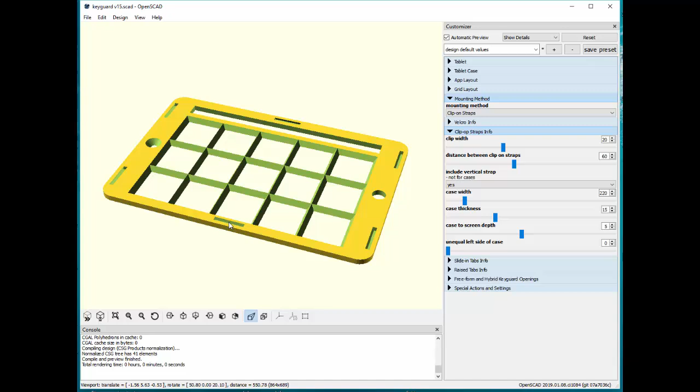I can add a vertical strap as well, meaning opposite these two straps, by saying yes. Then what I get are cuts made in the keyguard for a strap going the opposite direction. That option is not there if you're in a case, simply because cases get very weird on this side or this side. But they're pretty regular on either side of the long dimension.

So we'll put this back at no for now.

While we're here, we can set the distance between these clips. We can also set the width of the clip itself. So if I need a very narrow clip for some reason, all I do is change its width to something smaller than the default 20. I can set the distance anywhere between 20 millimeters between the openings to something possibly even larger than the keyguard itself. So that's larger than the keyguard, 120.

And that's really the only thing I need to do to get clips defined properly if I'm not using a case. So then I would just simply save this definition, this model off, and print it.

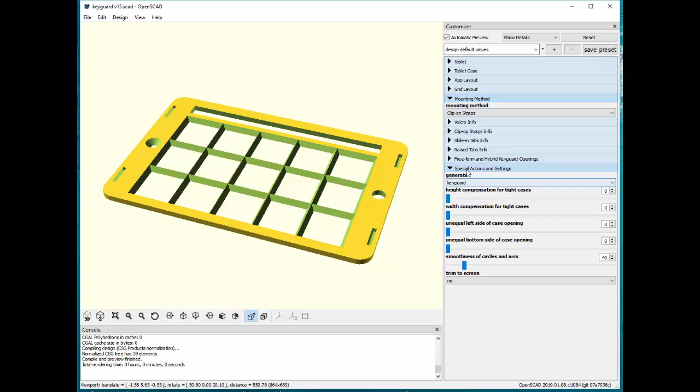To get the clips themselves printed, I look in Special Actions and Settings and choose Clip. And now there's the clip that I would use to attach one end of a strap.

And for the keyguard we saw a moment ago, I'd need 4 of these, or 6 if I had the strap going crosswise as well.

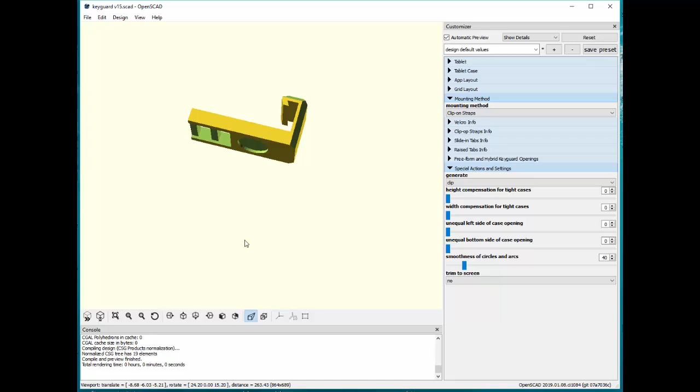Now we'll go back and look at that keyguard again. But this time we'll say that it's in the case that we looked at earlier, the blue case, which has a hard-sided screen protector inside a soft-sided case.

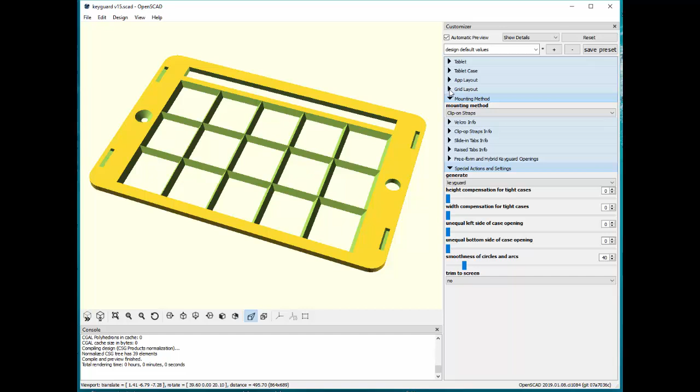I'll go up here and we'll choose Have a Case. Yes, we do. Well, as we noticed earlier, the screen protector comes right up to the edge of the screen, meaning that there's very little plastic on either side of the keyguard to put these cuts into.

I might have had to do this anyway if I were creating this keyguard, but I need to add some additional width to this keyguard, to compensate for the fact that the case itself is very narrow on either side. So down in Special Actions and Settings again, there's a way to compensate for tight cases either in height or in width. We're just going to do the width compensation for now.

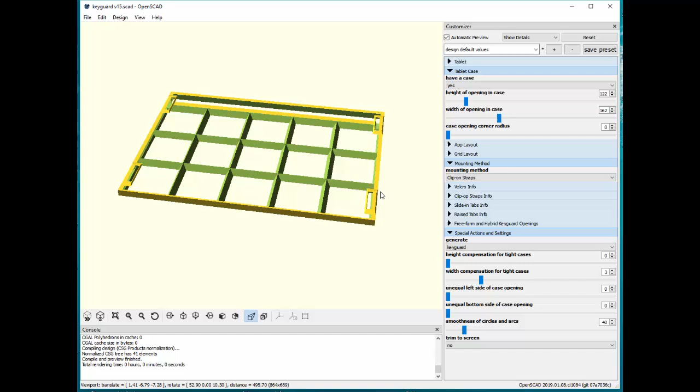I'll just take this up a little bit at a time. You'll be able to see that it's starting to thicken here. Let's zoom in - starting to thicken here. I want to get that thickness all the way out until it's underneath the cut that we're going to put in the keyguard. We're almost there. So I had to make it 12 millimeters thick, add 12 millimeters of thickness here, so that we have space for this little pedestal and the cut that goes inside it.

And you can see the pedestal a little bit more clearly here. The pedestal's height, how far this little ramped area comes up, depends on how thick your keyguard is and how far it is from the surface of the screen up to the edge of the case.

We measured that previously in the video, and the distance of case down to the screen was about 6 millimeters. We find that value in the clip-on straps info region, along with things like case width and case thickness. But here's the case to screen depth - we'll up it to 6, which is what we measured for that case, and you may have noticed the pedestals got 1 millimeter taller to account for the extra distance between the edge of the case and the screen.

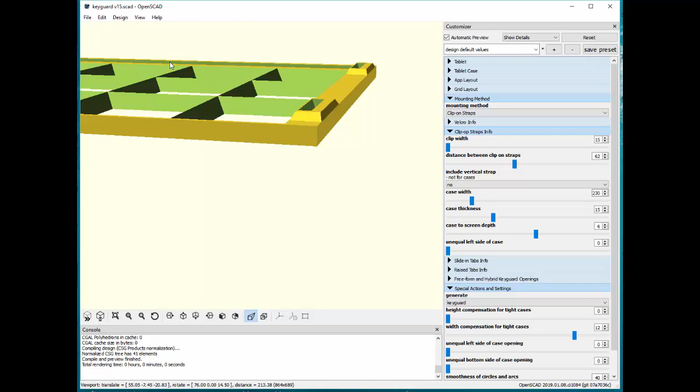Then we measured the case to be 230 millimeters wide, so we'll take it out there. You won't see any obvious change here because we haven't changed the dimensions of the opening in the case. But what we are affecting right now is what the clip will look like. So since we've already seen what the case looks like, let's go take a look at those clips.

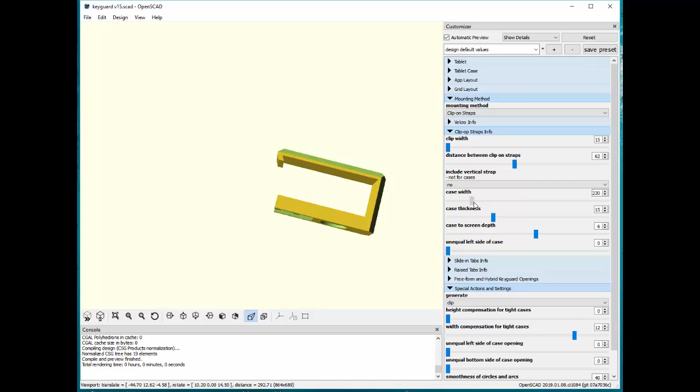And probably have to zoom out. So this is what the clip looks like to reach from the edge of the case all the way to that pedestal and groove cut in the keyguard. If we made the case wider, you'll see that the top of the clip extends out as well.

But it's only 230. And then the case is 15 millimeters thick. So that'll increase the gap in the clip. So we can now reach completely around the thickness of the case.

And the only other thing that would change this - now, because we're putting 4 clips on, we have to save this off and either print it 4 times or repeat it 4 times in the slicer before generating G-code.

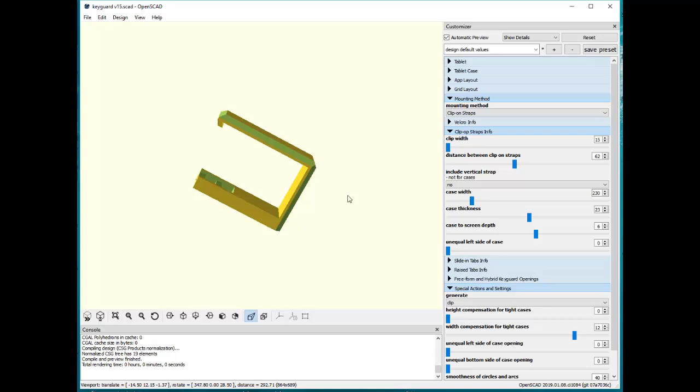But remember how there are cases that are thicker on one side - not thicker, the distance between the edge of the case and the edge of the case opening is wider on one side than the other. Well, if it turns out that you have a case like that, all you do is measure the left side, it's called unequal left side of case, measure that distance. If it's the same as the right side, then leave this value at 0. If it's different, then you're just measuring the left side and you'll set this to the left side value.

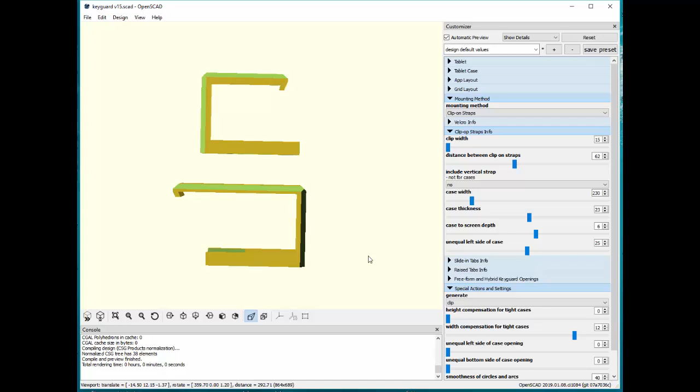So I think we saw that with the OtterBox Defender case, the distance was 25 millimeters, which is not the same as the other side. So if we set this to 25 millimeters, it will actually model 2 clips for us. One that has a shorter edge, which is actually to accommodate the 25 millimeter, and one with a longer edge to accommodate the other side of the case. And then we'll save these off and print 2 of them, and then we have all 4 for the case.

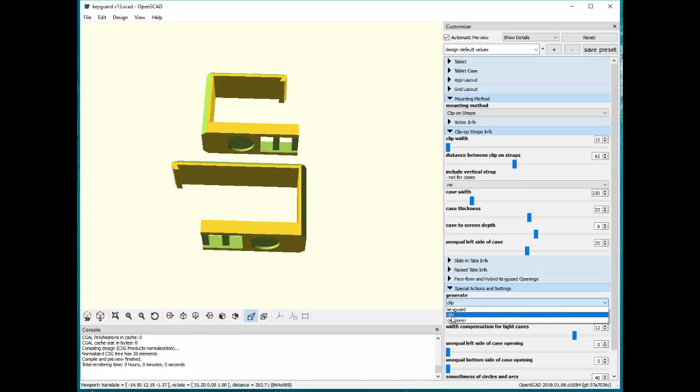And that's really all there is to defining a case - a clip-on, a set of clips for a case, the measurements we already took, plus choosing generate clip. And your keyguard, you're also going to want to generate that, especially so that it has these pedestals that raise the groove all the way up to flush with the edge of the case.